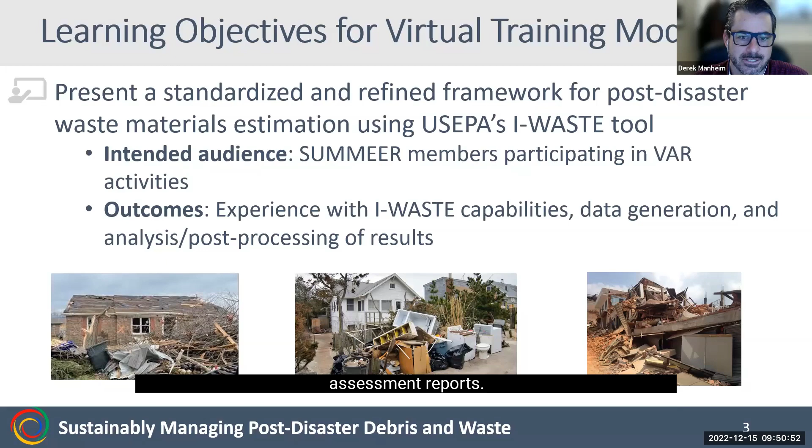And now I'll present a brief introduction to I-WASTE. The acronym I-WASTE stands for Incident Waste Decision Support Tool. As part of an all hazards planning framework, this tool was initially developed and maintained by the US EPA for responding to chemical, radiological, and biological events, and for managing contaminated debris streams. However, I-WASTE is also applicable to a diverse range of natural disaster events, as shown in the figure here, which is the focus of this particular training module. For example, I-WASTE can be applied to estimate debris characteristics from earthquakes, wildfires, floods, hurricanes, as well as tornadoes.

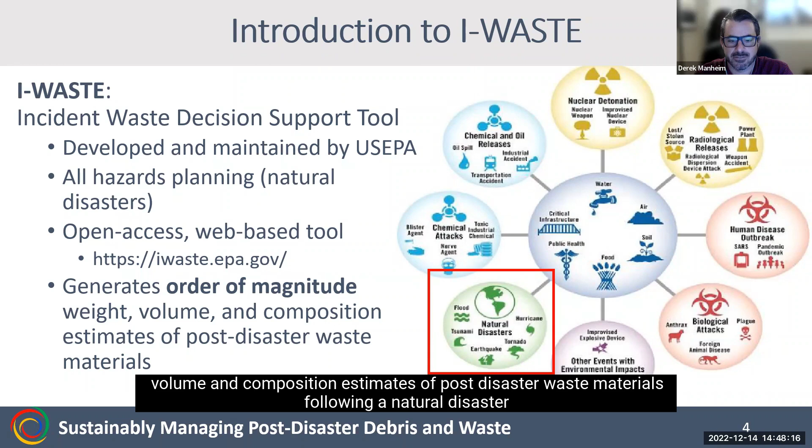Currently, I-WASTE is freely available as an open access, web-based tool. The web address is included in the presentation here so that you can actually access it during the tutorial portion of the training module. I-WASTE is a great tool for generating order of magnitude and approximate weight, volume, and composition estimates of post-disaster waste materials following a natural disaster event. I-WASTE contains three main user interfaces that I will review in detail during this training module.

The first interface is the Waste Materials Estimation Tool, or WME, that is used to obtain the actual predictions of waste quantities and composition. The second interface is the Facility Databases Tool, which allows the user to actually query and identify the location and characteristics of existing waste management infrastructure, including recycling and recovery centers, solid waste landfills, waste combustion facilities, and other management operations. The third interface is a repository of important guidance information to assist researchers with identifying relevant federal, state, and community-specific regulatory requirements for managing post-disaster waste materials.

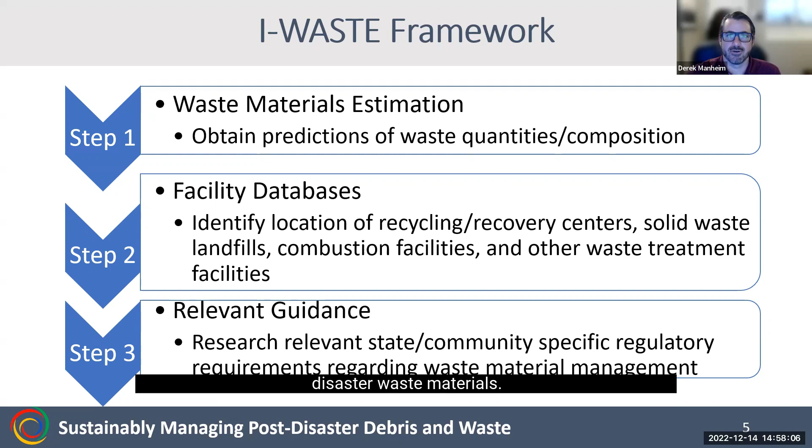The Waste Materials Estimator is the primary tool we'll be using within the greater I-WASTE framework for making predictions of post-disaster waste materials quantity and composition. Please note that it is a generalized worst-case scenario approach to debris estimation and that it assumes complete destruction of the disaster-affected area.

It is thus considered a disaster-independent approach, as it does not take into account the specific physical attributes of the disaster event, such as the flooding depth, the wind speed, or other important properties that influence the extent of building damage. However, the main strengths of the WME tool within I-WASTE is that it can generate the total structural, non-structural, or interior and open area material, such as soil, vegetation, or asphalt, mass and volume quantities for a disaster-affected region

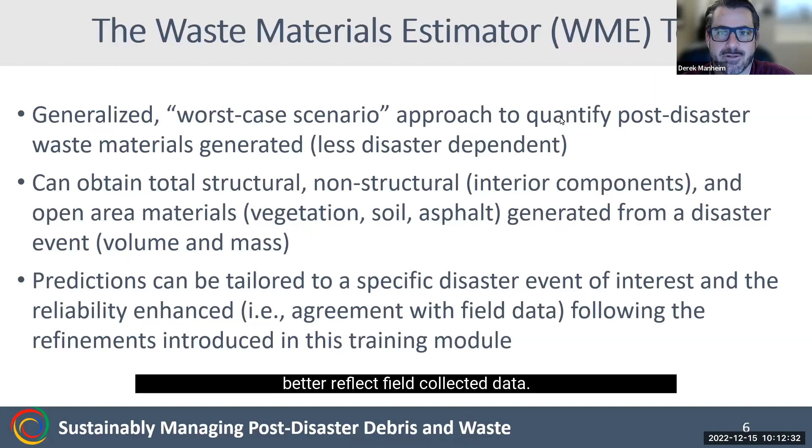of interest. The focus of this training module is to show you how predictions can be tailored to represent a disaster event of interest and to enhance the reliability of predictions to better reflect field collected data. To run the WME tool within I-WASTE, the user will need to specify a few important inputs, as observed in the figure to the right.

These inputs include the total affected area, square miles, the number of movie theaters, hospitals, single-family homes, hotels, offices, primary schools, and shopping malls. Importantly, the building occupancy classes delineated by the WME tool are consistent with HAZUS-MH, as shown in the parentheses on this slide here. For some inputs, the number of small, medium, and large buildings are necessary to define. The definition of what constitutes either a small, medium, or large-sized building can be accessed within the WME tool by clicking on the blue heading for each building occupancy class.

One of the most difficult steps to running I-WASTE is to specify the necessary input parameters. If the input parameters are entered incorrectly for a given disaster event, then the reliability of predictions will be significantly affected. Therefore, to better constrain the WME simulations and improve the reliability of the results, the comprehensive data management tool available from HAZUS-MH must be consulted to obtain estimates of the number of buildings within each occupancy class. Prior to initiating WME predictions, I will suggest running HAZUS-MH simulations for the disaster event of interest to ascertain the specific building stock attributes within the disaster-affected region.

To set up, run, and summarize the results from HAZUS-MH, please refer to the companion training module focusing specifically on HAZUS-MH. After running a successful HAZUS-MH simulation, you will need to identify the census blocks that experience some extent of damage to the general building stock. This is a critical step, as I-WASTE will assume that all the buildings specified in the inventory as input to run the tool will be completely destroyed in the wake of the disaster. Therefore, a conservative damage level threshold identified from previous research is to consider only the buildings with damage greater than 1% from HAZUS-MH simulation results.

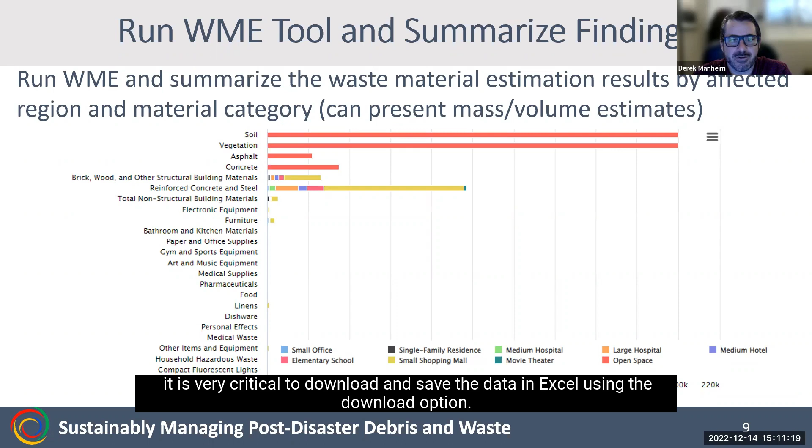Once you have plotted and tabulated the WME results, the next step is to take some time to review the major assumptions and parameters applied to generate the predictions of waste quantities. Ask yourself the important question of whether these predictions seem reasonable.

In this reasonableness check, the first item to review is the Estimate Criteria tab that summarizes the general details behind the assumptions used to estimate the quantity of waste material generated. Of the waste material, the category to be most judicious with during this critical review is the open space category.

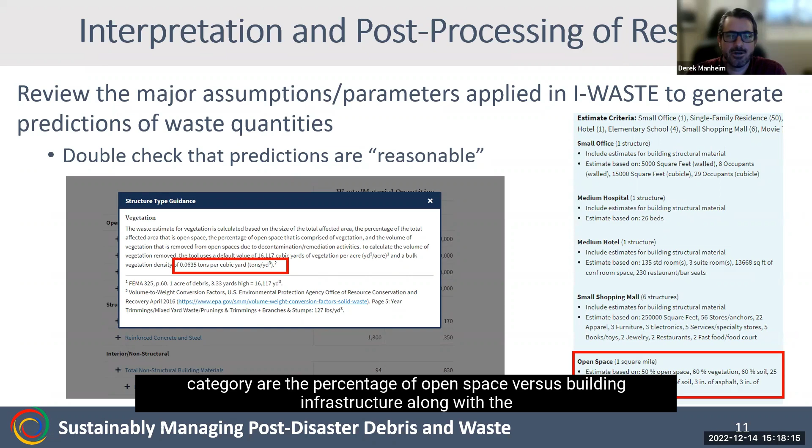From the Estimate Criteria tab, the major parameters identified for the open space category are the percentage of open space versus building infrastructure, along with the percentage of vegetation, soil, asphalt, and concrete, as well as the depths of these materials used in the simulation, along with the densities of each material. The preset densities that are used in I-WASTE for vegetation, soil, asphalt, and concrete materials are 75, 1,521, 819, and 2,600 kilograms per meter cubed, respectively.

Of the major parameters that are identified, only the percentage of open space can be computed using the data obtained from CDMS by comparing the total building to the total area per census block. The remaining parameters cannot be estimated nor informed from the details provided in CDMS. However, they can be calculated using the National Land Cover database available from USGS, if more reliable simulation results are in fact desired.

In addition to the Estimate Criteria tab, the waste material category links, highlighted in blue, can be selected to understand what material densities are used in the calculations. For example, the standard density applied for vegetative materials is 0.0635 tons per cubic yard, which corresponds to 75 kilograms per meter cubed. This has been updated from 4 tons per cubic yard used in previous I-WASTE versions.

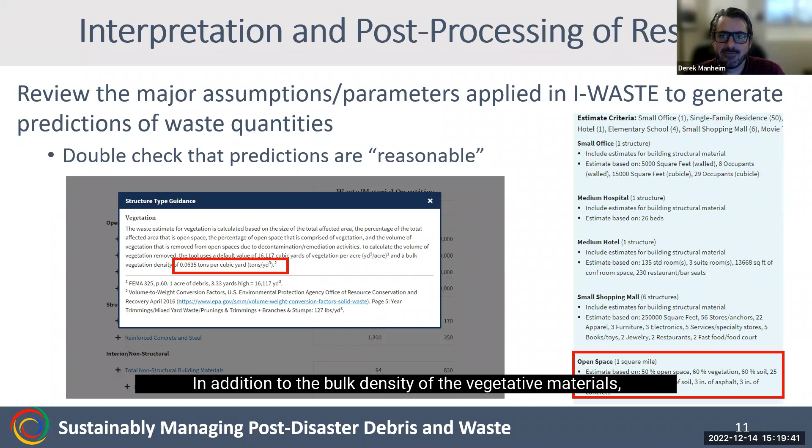In addition to the bulk density of the vegetative materials, a standard land cover vegetation density is assumed in I-WASTE. According to FEMA, for an average 1 acre area in the US, approximately 16,000 cubic yards of vegetation are present and contribute to the debris generation following a disaster event. Note that the more advanced user cannot update these factors manually if more site-specific estimates of vegetative debris are desired, as they are hard-coded into the WME tool.

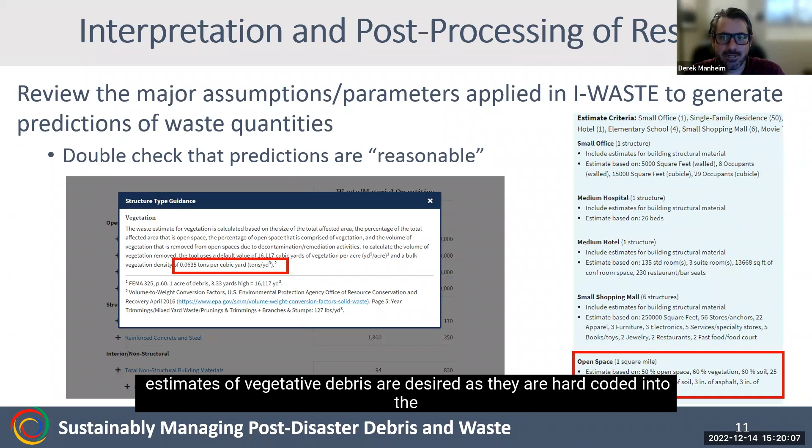In addition to this validity check, it is often helpful to construct supplementary figures or tables outside of I-WASTE that assist in the presentation and interpretation of the debris estimation results. Using the Excel data that was generated, for example, plots can be generated in MATLAB or Python that compare I-WASTE predictions for various regions of interest.

For example, I have shown here some results comparing I-WASTE simulations for 2 regions affected by the Michigan flooding event in 2020. For more reference, please consult the published report summarized on the SUMMEER website. The link is provided on the slide here.

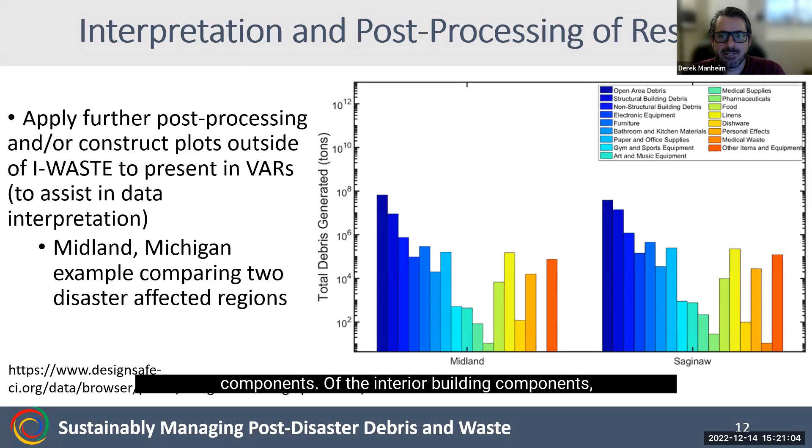The first plot compares the total post-disaster waste materials estimation as a function of the waste material category. For both regions, the open debris is significant, along with structural debris components. Of the interior building components, furniture is associated with the largest debris tonnage.

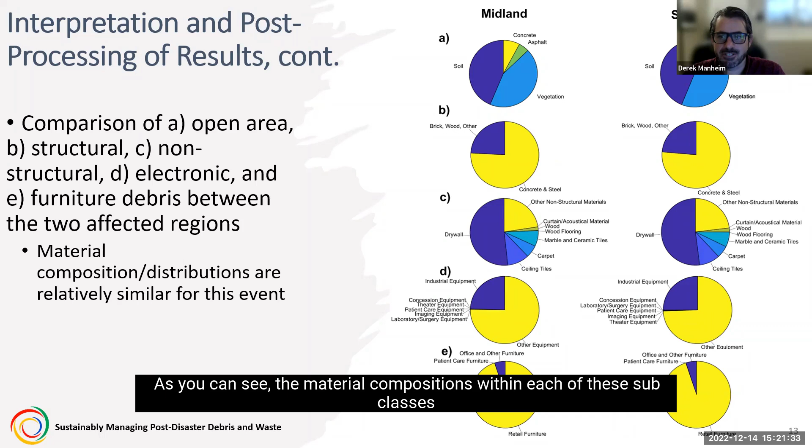The pie chart shown here demonstrates the differences in material composition as a function of open debris in panel A, structural debris in panel B, non-structural debris in panel C, electronics in D, and furniture in E, between the 2 different regions. As you can see, the material compositions within each of these subclasses for each of these 2 regions were relatively similar when comparing the overall I-WASTE predictions.

Following the WME interface, the next step will be to identify potential treatment and disposal facilities in the disaster-affected region. The second tab available within I-WASTE is the Facility Database Query tool that can locate a number of waste treatment facilities in the disaster-affected area.

Facilities relevant to the SUMMEER applications might include industrial, MSW, and C&D waste landfills, along with combustion and recycling recovery facilities. Within the recycling recovery facilities, the user can select from a variety of classifications, including metals, tires, or electronic-specific facilities. In addition, other waste management facilities, such as wastewater treatment operations, hazardous waste landfills, or decontamination centers can also be searched if dealing with hazardous liquid or solid streams.

When performing the facility identification step, it will be necessary to specify the radius of influence, or ROI, that is feasible for managing the post-disaster waste materials. The ROI can be approximated based on the severity of the disaster event. Disaster events that are less severe will result in fewer disturbances to the roadways and bridges and will enable more practical or economical transportation of waste materials to facilities located farther away from the disaster focal point.

For the upper limit, approximately 20 miles is used considering the large quantities and densities of generated materials. When dealing with more severe disaster events, a smaller ROI is recommended, where a lower threshold of 5 miles has been suggested based on previous data presented in our collection of published virtual assessment reports. Please note that these are suggested guidelines and are not truly definitive estimates of waste hauling distances that are practical for waste management.

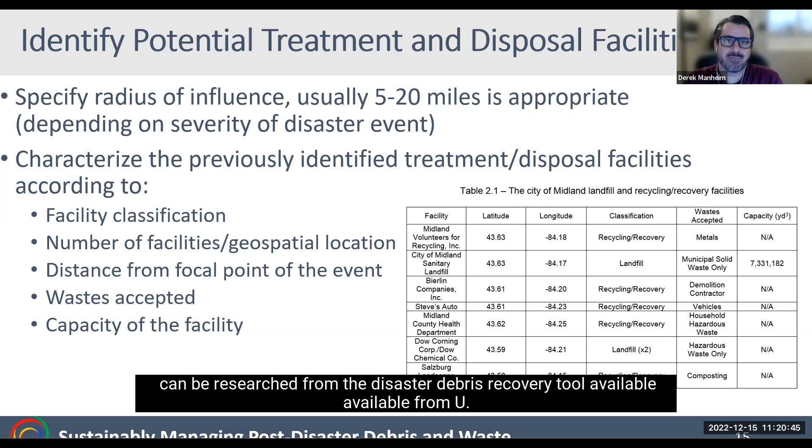Most of these characteristics can be researched using the query tool available in I-WASTE, such as the facility classification, number of facilities, and waste accepted. Additional information, such as the capacity and distance to the focal point of the disaster event, can be researched from the disaster debris recovery tool available from US EPA and or calculated using ArcGIS.

The last interface that can be explored in I-WASTE is the Relevant Guidance Information tab, which provides useful information about the regulatory requirements and general disaster waste management policies on the federal, state, and local levels. Using this interface, you can query various case studies, fact sheets, regulations or guidance documents, planning documents, and important information for pricing debris management equipment that will be useful in generating the virtual assessment reports.

Now I will walk through a case study tutorial using the Midland, Michigan flooding event as an example application of I-WASTE and the CDMS tool available within HAZUS-MH. Please recall that using the CDMS tool and corresponding census tract damage level results from HAZUS simulations are critical prerequisites to properly define the building inventory inputs in I-WASTE. Again, you can refer to the companion training module focusing on HAZUS-MH to review how to set up, run, and analyze the debris generation results for a flooding event.

This particular disaster event was caused by a historic rainfall in the central Michigan region, which was exacerbated by a succession of dam failures and breaches, resulting in catastrophic inundation and damage to both urban and rural areas located downstream. The flooding damage was centralized among two particular urban locations, the city of Midland and Saginaw.

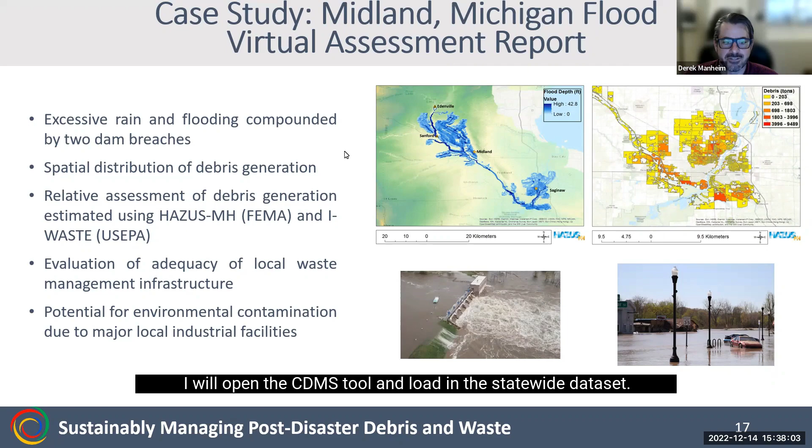To start the tutorial off, I will open the CDMS tool and load in the statewide dataset within the Comprehensive Data Management System tool available within HAZUS-MH. Before using the tool, make sure you load in the statewide dataset for your state of interest. And to do this, you'll have to download the statewide dataset as a .exe file from the FEMA repository available online. Place this .exe file in the correct folder on your computer, and then extract all of the files by running the .exe application.

After you have done this, go to Tools, specify HAZUS-MH data location, and here you will specify the path to the directory where you have placed this .exe file. So when you extract all of the contents, you'll come up with the MDF file. So that MDF file is what you want the CDMS tool to locate. So here I have it set to my C drive, HAZUS data inventory, and Michigan, indicating the Michigan data set. So I'll close this.

And if you have done this correctly, you will see that your current state shows up in the box on the left-hand side here. So once we have correctly loaded in the data set, we'll now go to the Query Export Statewide Datasets tab. And that's already selected here.

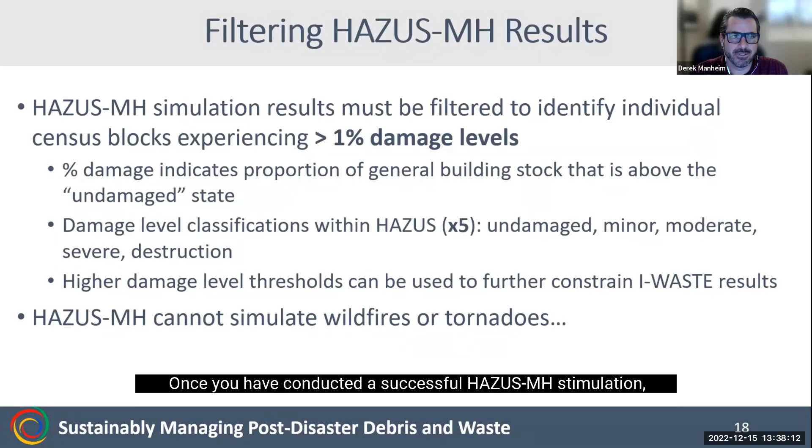And now I'll walk you through how to filter the data by building damage level in HAZUS-MH. Once you have conducted a successful HAZUS-MH simulation, you'll be able to identify and filter the individual census blocks that have experienced greater than 1% damage levels. As a review, 1% damage level threshold indicates that at least 1% of the general building stock in the affected region was classified as above the undamaged state, or into one of the 4 damage-associated states.

Remember that there are 5 overall damage levels used by HAZUS-MH, including undamaged, minor, moderate damage, severe damage, and destroyed. Note that if a higher damage level threshold is used, I-WASTE simulation results will be further constrained in terms of the quantity of debris generated. Therefore, a lower value is usually more conservative in that there is a significant uncertainty associated with the damage states predicted by HAZUS.

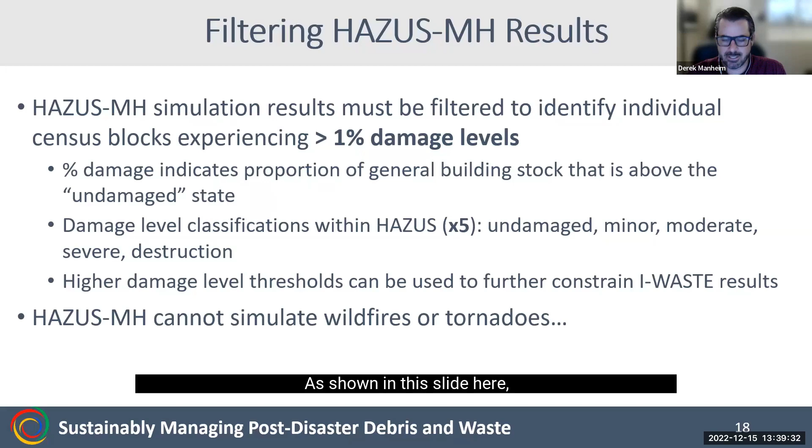For the Camp Fire events in California, this was obtained from CAL FIRE data, where it now shows the destroyed structures in red, major, minor, and affected structures in orange, yellow, and green, and then no visible damage in black. So once you have this data in ArcGIS, you can overlay this geospatial information onto the census block map data provided in HAZUS to ascertain which census blocks have experienced greater than 1% damage.

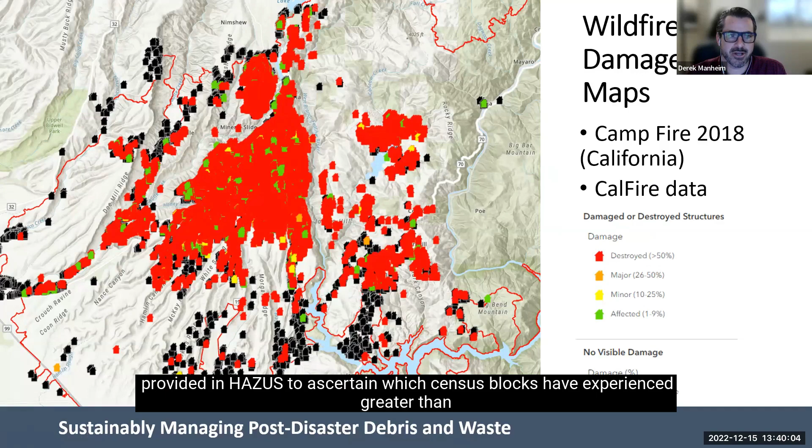A similar approach can be taken for tornado type events, where a significant amount of data can be obtained from STEER, Structural Extreme Events Reconnaissance Group, from their own field reports available from their reconnaissance missions within DesignSafe, as shown here. And again, I've labeled destroyed structures in red, severe, moderate, minor in orange, yellow, and green, and then undamaged in blue. And you can see how the damage state is related to the overall tornado path. This was for the Linwood tornado in Kansas in 2019.

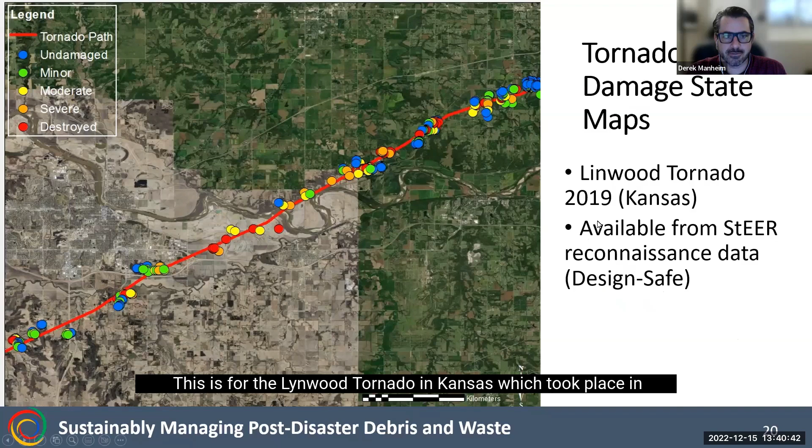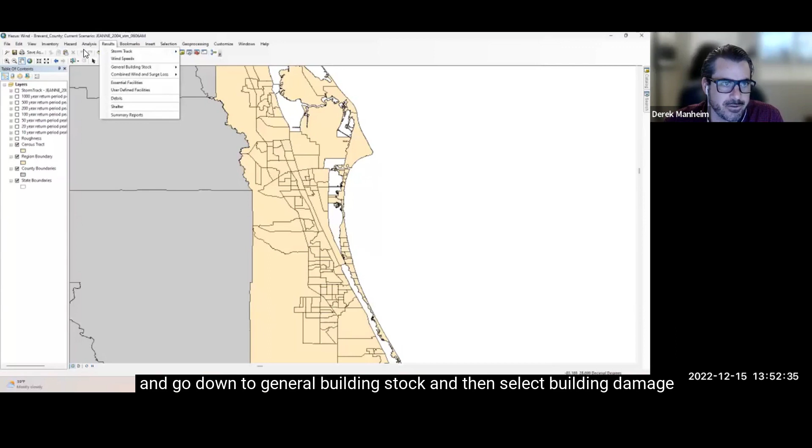Now I'll show you how to obtain the damage level information from HAZUS-MH. So on this screen, we are working within HAZUS-MH. We have already run a successful simulation. We would like to access the damage state results. To access these results, we'll go to the Results tab at the top here and go down to General Building Stock, and then select Building Damage States, and then by occupancy.

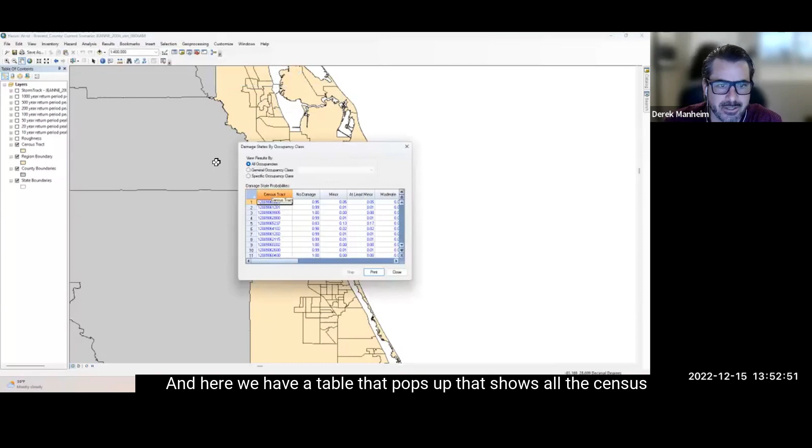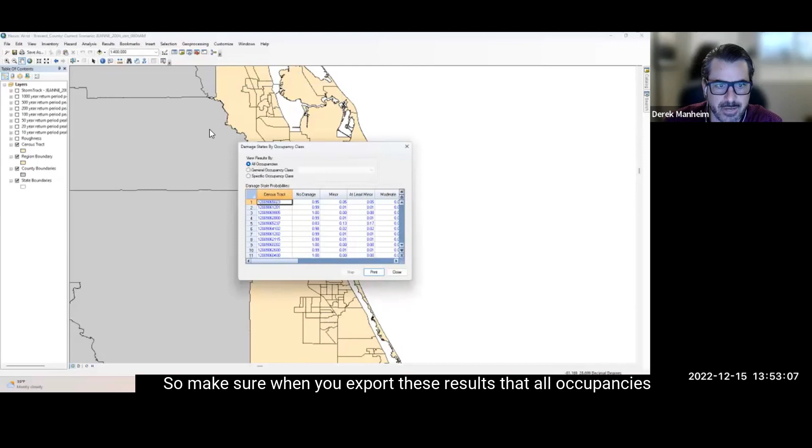All right, and here we have a table that pops up that shows all the census tracts again in rows, and then you have each of the 5 damage level classifications in columns across the table. So make sure when you export these results that all occupancies are selected here. That eases the analysis of the data overall.

And note that you can also filter by the 7 specific occupancy classes we are interested in for conducting the I-WASTE simulations, but the overall filtering of the results becomes a little bit more complex and difficult. So we'll stick in most of the cases with using all occupancy classes.

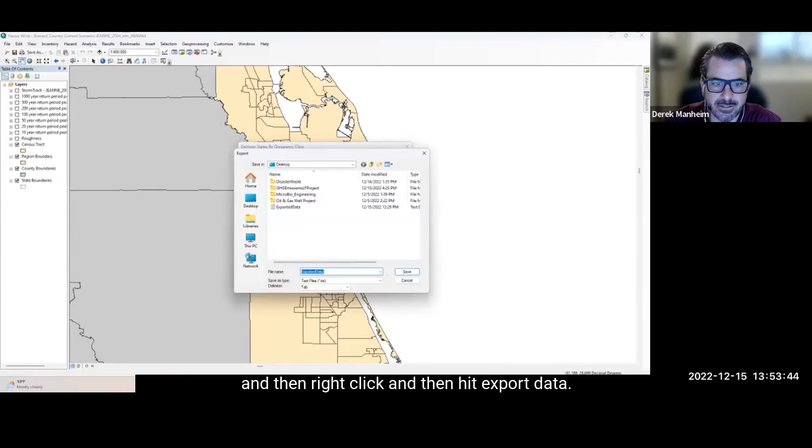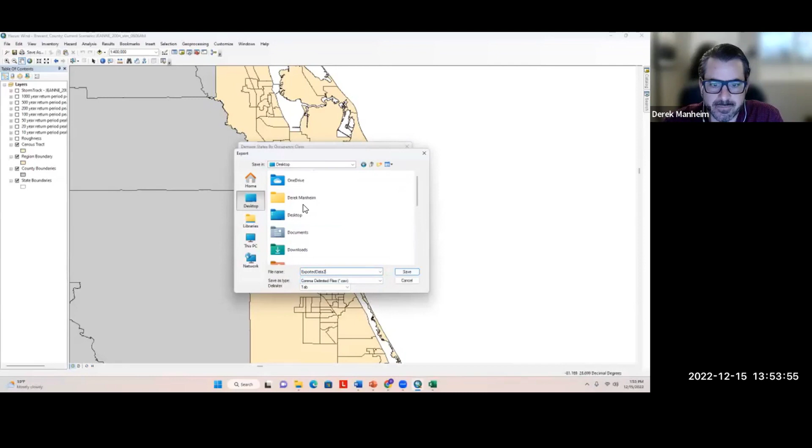You can then highlight all the results by selecting each of the columns, and then right-click, and then hit Export Data. Then you'll select CSV file type and hit Desktop. And you can name your file to whatever name is appropriate. And then all this tabulated data will be exported to a CSV file, and we can now work with it in Excel. All right, so now we have opened this exported CSV file in Microsoft Excel.

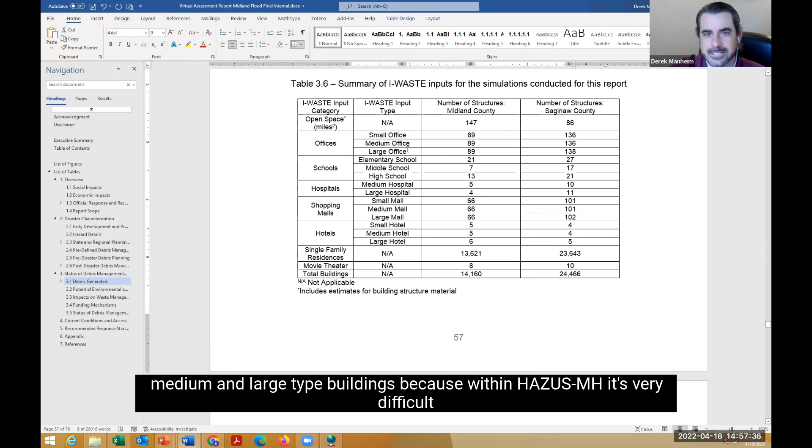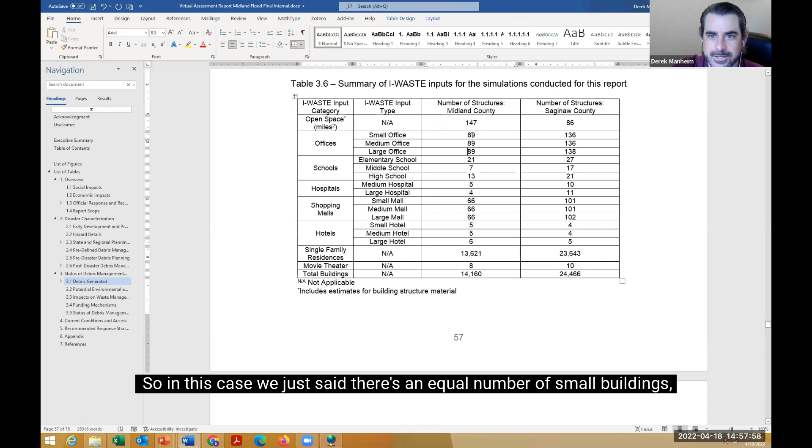And notice that we used a number of buildings for small, medium, and large type buildings, because within HAZUS-MH it's very difficult to further delineate each of these structures into small, medium, or large type classifications as I-WASTE classifies things. So to make things more simple, we just assumed equal distribution and apportionment of these different size classes. So in this case, we just said there's an equal number of small, medium and large buildings. So that's where those values came from in terms of the overall inputs to the waste materials estimator in I-WASTE. So I will now enter these inputs into the WME tool and run the simulations online.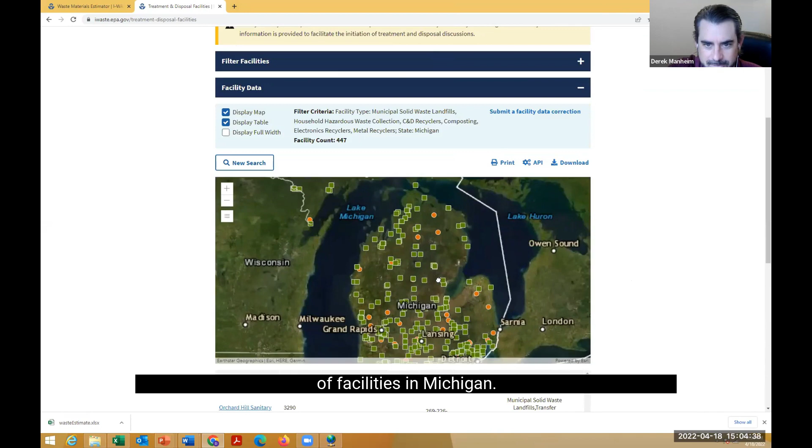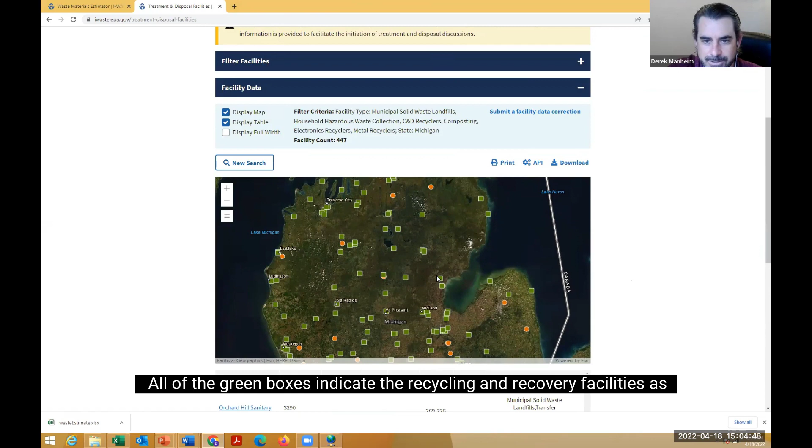So orange circles indicate landfills. All of the green boxes indicate the recycling and recovery facilities as populated by the Disaster Debris Recovery Tool from US EPA. So now we're going to zoom in on Midland. See, we have about 3 facilities located in maybe a 5-mile radius of influence.

So this particular disaster event was relatively severe in terms of the damage to the transportation, road networks, and bridges, for example. So the radius of influence of where we can distribute our waste once collected from the disaster event is relatively smaller. So you can see within that radius, it's about 3 facilities.

So we have a potential household hazardous waste collection facility. We have a metals recycling facility located near the landfill. You can't see the landfill, it's underneath this box here. And then you also have the composting facilities. So again, maybe located in a nearby location, we can take some of that woody debris, vegetative and soil waste to that compost facility as a potential avenue for sustainable management.

All right, and you can actually also download the facility list to Excel. That list will give you the address of the facility, contact number, phone number, as well as a source ID recognition number. So you can take that source ID number and then further use the Disaster Debris Recovery Tool to obtain more information, such as the GPS coordinates of that location. You can also get some other classification information in terms of what wastes are accepted.

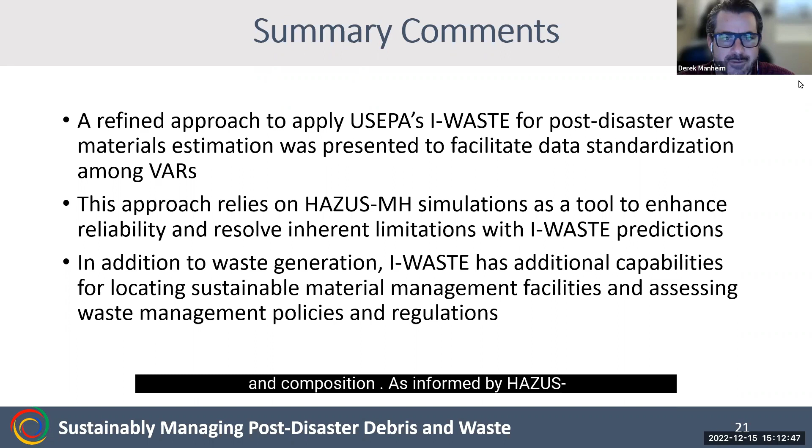In this preliminary virtual training module, a refined approach to apply US EPA's iWaste was introduced to reliably estimate waste material quantity and composition. As informed by HAZUS-MH, this approach has been developed to facilitate data standardization regarding the virtual assessment reports and to overcome inherent critical limitations with iWaste in terms of disaster specificity and potential overestimation of material quantities. We have also highlighted some important additional capabilities available within iWaste for locating sustainable material management facilities and researching important waste management policies and regulations.